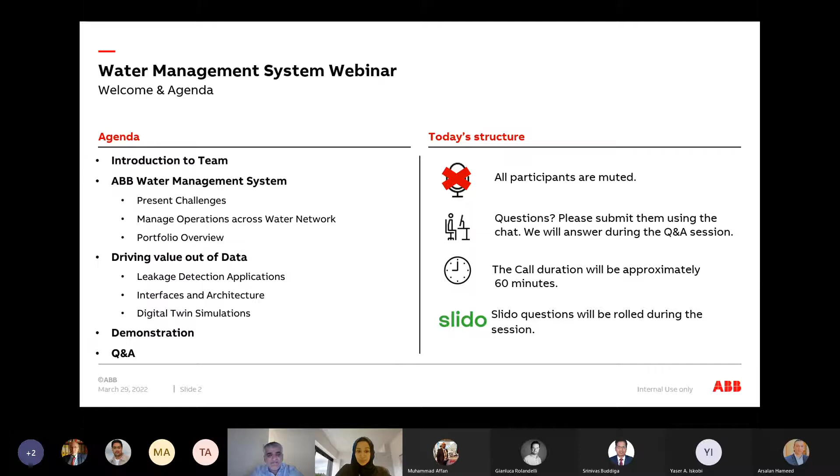So today our main speakers will be Mr. Muhammad Affan. He's our hub sales manager for power and water, taking care of the region of India, Middle East, and Africa. And he's also our UAE cluster and head of sales. Our next speaker will be Mr. Gianluca Rolandelli, our global product manager for smart water solutions, also from the same division, energy industries.

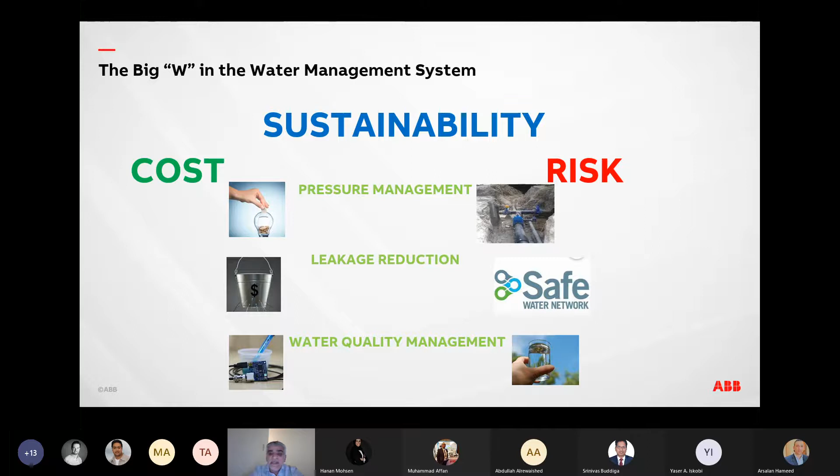As I promised, the three numbers and why these three numbers are worth remembering for us. 62 is the percentage of growth we are going to see in the water demand in the next 3 years, 2025. This is the Middle East region. These are the statistics. Very, very scary numbers. I don't think that there is any other utility service that requires such significant investment in the infrastructure growth as water today. The second number, 40, this is the percentage of water we are losing today to leakages typically.

I really hope that the numbers in Saudi are better than 40%, but the world-class utilities are operating that network to below 10%. Singapore, for example, prides itself among some of the other utilities on operating its network below even 3 to 4%. And that's really world class. And I'm pretty sure that we in the region can do much better than what we are doing today. The third and the last number to remember is 6%. And this is the GDP loss that economies in the Middle East could suffer if water scarcity is not addressed.

I mean, thank God we have got pretty robust water networks. We've got economies which are actually supported by revenues from the oil and gas exports in the Middle East region. We have, touch wood, been away from severe weather and wars. So there's not been a lot of disruption to the water distribution, water transmission and water generation in the region. Let's hope and pray that it remains that way. But there is a threat that if the water demand and gaps in the supply and demand interrupt the economy, this is the potential impact.

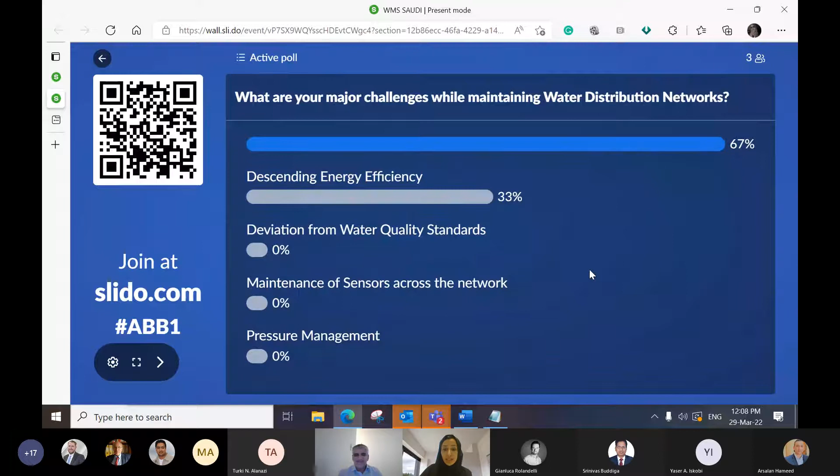So Hanan, I've just submitted my response and I'm actually answering this on behalf of a utility that we are working very closely with here, the Al Ain Distribution Company. So I hope Al Ain allows me to respond on their behalf. Yes, and I think that's great. And I think there is one missing point, which I didn't mention, which is pressure management. But tell me, Affan, why did you choose increased non-revenue water and leaks? What's the main reason behind that?

Yeah, I think I'm more focused on the 40% statistic that I mentioned. Thankfully, there's been a lot of attention from the management of the water distribution companies in UAE towards reducing this non-revenue water. However, the fact is that the network is actually growing faster and the demand is growing faster than the investments being made into the technologies that allow them to identify the leaks. And therefore, what is very clear is that there is still over 35% of water which is counted as non-revenue water. And we have been asked to support these utilities in terms of identifying technologies, but not only identifying technologies. I think technologies exist. The challenge is really implementation of these technologies through projects.

And hopefully I can just address one more point while we get the results: it's not necessary to do a very large project, a 15, 20, $30 million project, and cover the entire network and do the project in one go. We can plan and implement these projects in smaller chunks, especially when it comes to distribution networks.

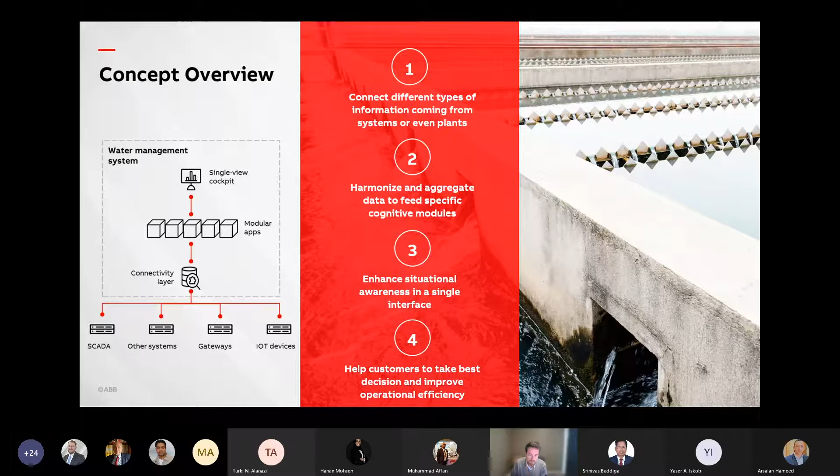Thank you. So this is just to add the concept of visibility. Thanks to the digital twin, we can see a complete digital replica of your network. So in order to do some tests, or if you want to upload a network that is similar to the current water distribution network, but with a different layout. If you want to investigate how your current assets, your infrastructure can react if you modify a topology or you add a sector, you can do this with the concept of digital twin.

And then you can also calculate the operational KPIs or decide which is the best energy efficiency consumption thanks to such kind of tools. So the concept is that some operators, some users will monitor the current status of the network, the current KPIs, but there are also some other kinds of users that can also run simulations on a future layout of the network or estimate the future evolution of the key parameters of the network. We can go to next slide.

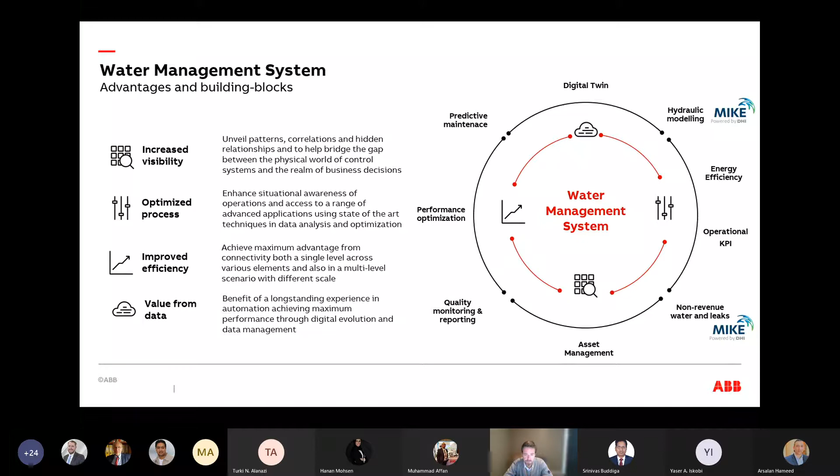And so I would switch now to my live demonstration. So I will share now my screen to show you the live demo of the solution. And then if there are any questions now or later, I will be more than happy to try to answer. So if you agree, now I share my screen and I kindly ask you, when you see my screen, to confirm that you see my screen.

Yes, Gianluca, we can see your screen. Thank you very much. Any questions so far? So far, no question for me.

Okay. So what you see here is the user interface. It's a web interface. So Gianluca, can you zoom in? Can you zoom in, please? A little bit. This way? Zoom. Yes. Okay, good.

Okay. So this is a web interface. An important concept is that the operator doesn't have to install any client. Typically what we do is install a virtual machine that will be the main server, with another virtual machine that will contain the hydraulic tools that do the hydraulic simulation of the network. So in terms of software architecture, and I also have some slides later if you have more questions on this, this is a fully owned ABB software that has completely embedded and integrated some hydraulic tools that we have taken from DHI, the Danish Hydraulic Institute.

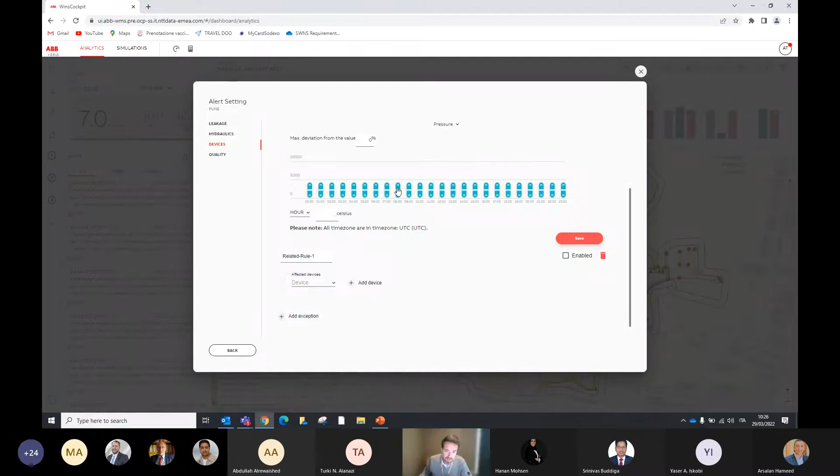So you can also select, for example, if I want an alert about pressure, and I want to define also which is the device that is generating a certain alert, and I can also define the timeline and in which time of the day this alert will reach a certain threshold, and in this case the alert will be automatically generated and displayed here on the left side. So also the concept of helping the user to configure and automate the alert that he wants to receive, because he has the task to analyze a certain portion, a certain point of view of the network, thanks to all the data that we are collecting.

Then, of course, there is also the possibility to look more granularly into a particular point of the network. So I can select a certain item, for example, a junction or a pipe of the network, and I can look at all the data, vertical data in that point. And in this case, I can see static and dynamic metadata of the network. And again, the trend that you see here can be also filtered. So I can decide here to remove elevation and only monitor base demand and unit leak per pipe length in that point, or only look at one parameter or another one and define the trend, define the time granularity, and do a vertical analysis on that part, or decide to monitor multiple parameters in that particular point.

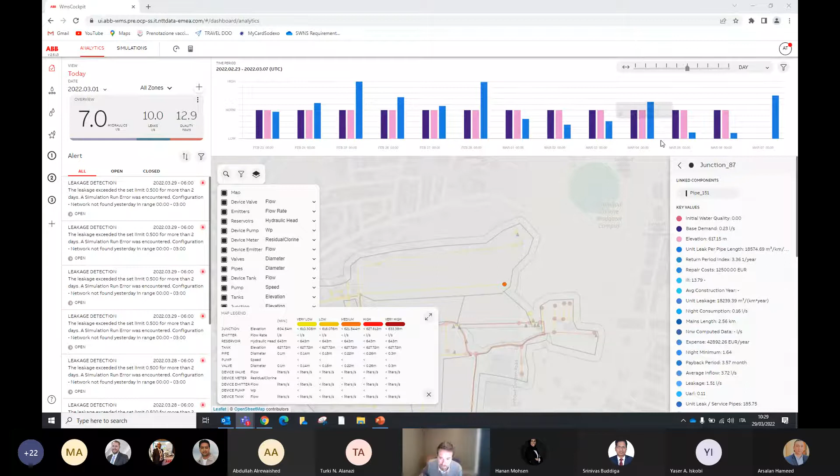What we see here is the main dashboard of the network. Then we have a dedicated dashboard for hydraulic demand, calculating maximum, average, and minimum hydraulic demand. Again, for the whole water distribution network, but you can also select a dedicated sector of the network, and then you can analyze only a certain DMA or a dedicated sector of the water distribution network.

And at any moment, you can also look at the main KPIs of the network here. So all the KPIs estimated by the system can be displayed here. And again, you can define for which sector you want to look at it, and you can also do an analysis and comparison between sectors regarding these KPIs of the network, which are also used to estimate the hydraulic balance of each district of the water distribution network.

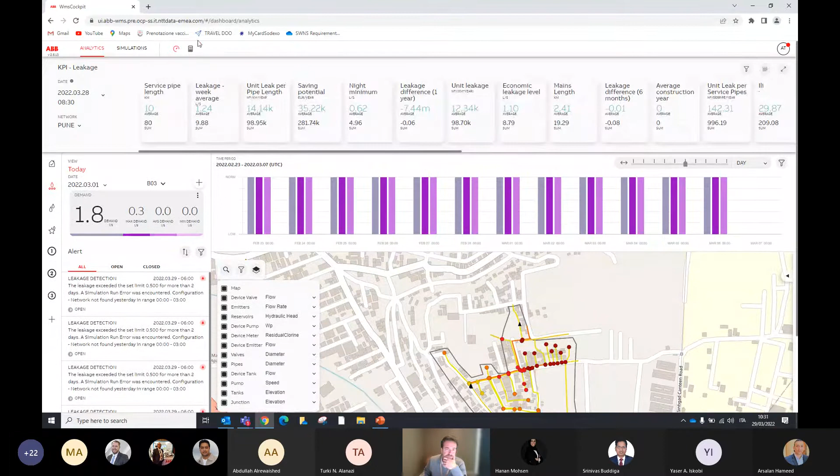Then we have a dedicated view for leakage. Here we can evaluate the leakage parameter every day. The leakage is calculated one time per day. So we can see how the leakage was every day, and we can define an automatic threshold that can alert us if a certain sector is having a bad performance in terms of leakage. And this can also be done, of course, for the whole network, so we can immediately monitor the maximum, average, and minimum leakage of the whole water distribution network.

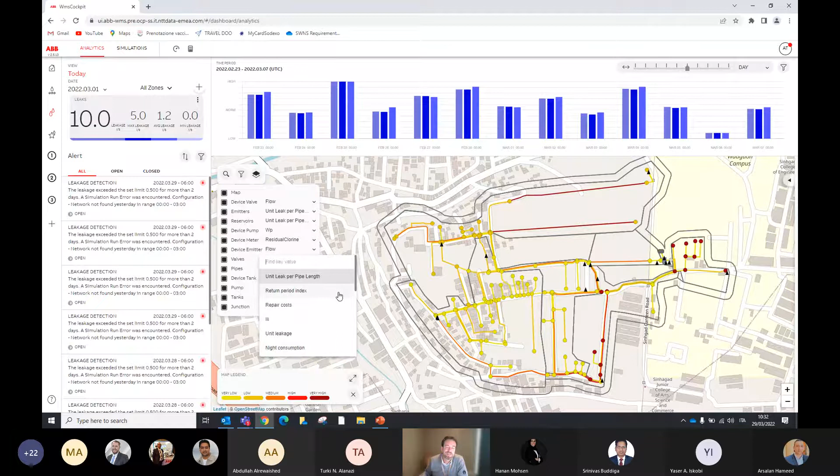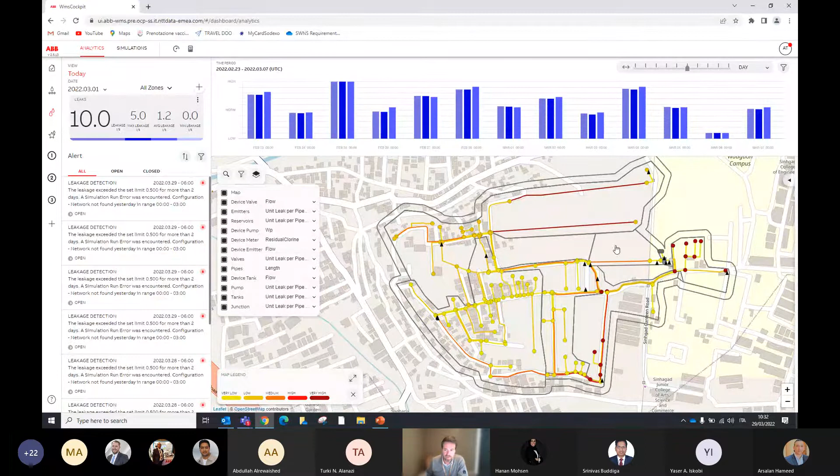And when we switch from one dashboard to another, the system is also automatically adjusting the parameter here. You can manually adapt the parameter, but since I am in the leakage view, the drop-down list is now based on the leakage parameter for each different asset of the water distribution network. So this is done automatically for the user.

There is also a dedicated view on water quality. This is another point of view of the water distribution network, where the estimated water age is calculated in terms of hours the water is resident in the pipe, for example. For each pipe or valve, we have the water age, but we can also select parameters such as substance concentration or residual chlorine. These are water quality parameters that are estimated and digitally represented by the hydraulic modeling tool.

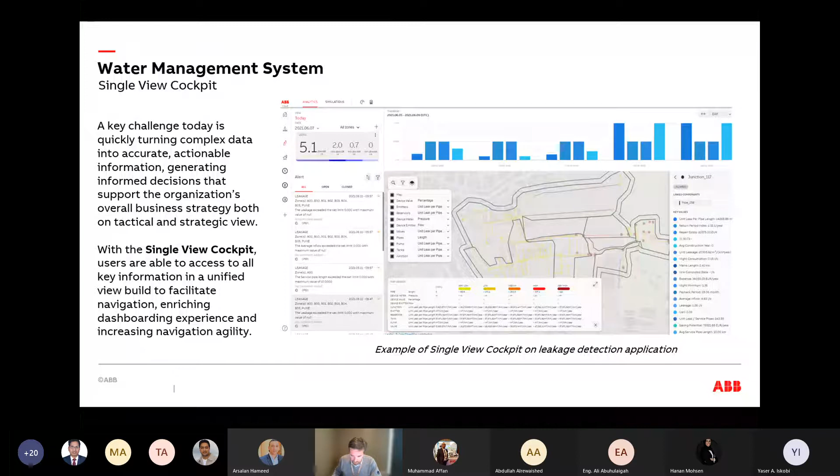In order to answer this question, I would like to use a slide. I should have the slides of today, but let me search for one slide. Yesterday I received the slides, so I will share the slides of today, but I prefer to share it myself. Give me one minute. Okay, this one. I found it. I'm sharing my screen again. Please confirm when you see my screen. Do you see my screen again? Yes, we can see your screen.

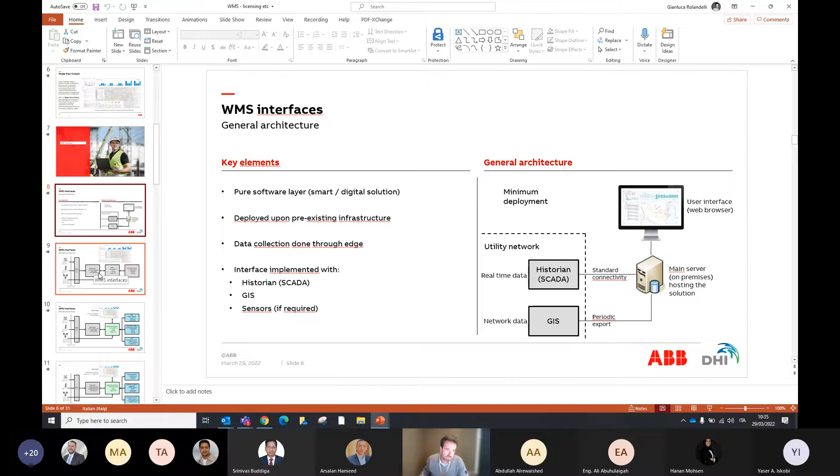Okay, thank you. Here you see the general architecture of the system. Typically, this is a smart digital layer that we install on top of a pre-existing control system, if there is a SCADA or a DCS. This system is for monitoring, implementing the digital twin, and calculating simulations, but we take the data from a control system. Of course, if the control system is not present or must be updated, ABB also has an offering for SCADA or control systems. But in general, this system takes data through an edge from SCADA or smart sensors, and we do not give the data back to the DCS or SCADA.

Why? We have typically implemented the concept of a data diode, because in the initial phase of deploying such a solution, we do not want to interfere or break something in the control system, if present. We want to read data, monitor data, and calculate the KPIs of the network from a hydraulic point of view, merging the data we collect from the control system with the data automatically evaluated by a hydraulic model running in the backend of this water distribution system.

So the WMS is the interface you see here, and it sits in the middle between the data we collect from the field and the data automatically running in the backend, in the digital twin and the hydraulic modeling. The control system typically already exists, and we interface with it using standard protocols like OPC UA or DA, for example.

We want to give feedback to the operator regarding which could be the optimal set point to configure in the SCADA in terms of valve position, for example, according to an objective that I want to achieve. For example, let me use the concept of energy efficiency. I have also seen from the questionnaire that we did after the first part that energy efficiency and energy optimization is a key concept that a utility like you is investigating.

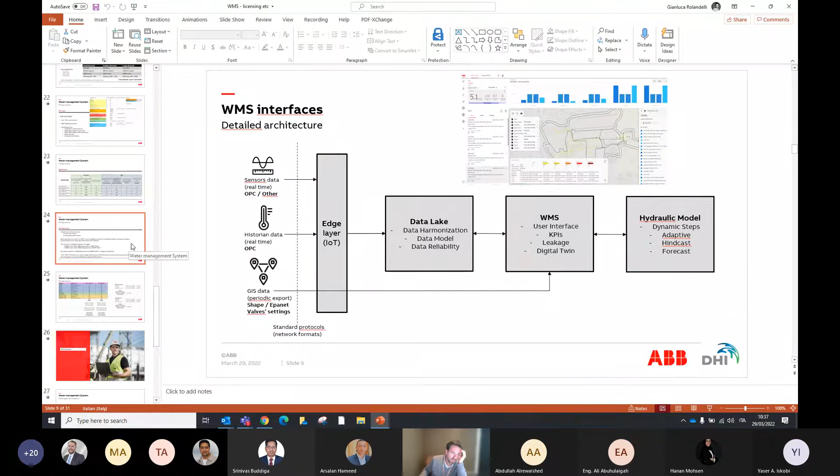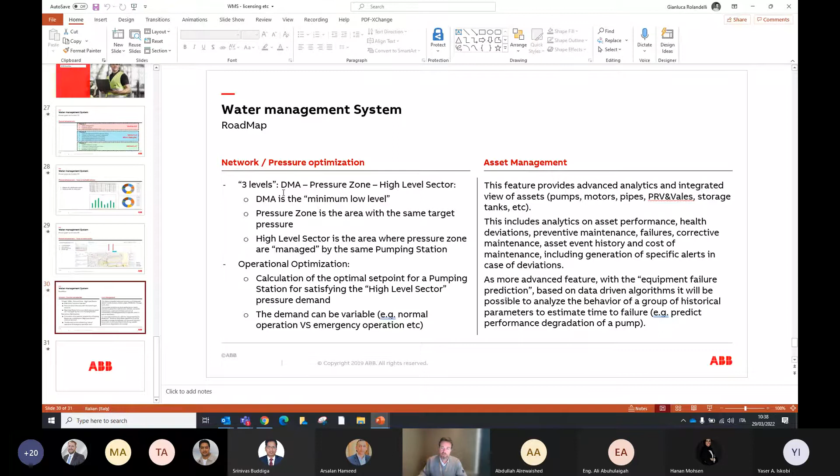So in order to do that, we have to define the pressure optimization. And for example, in terms of defining the optimal energy consumption of a pumping station, we have to define what is a pressure zone. So you can imagine here, if we switch back to the demo, that if you have a water distribution network, instead of a leakage zone, you can imagine this as a pressure zone. So instead of evaluating the leakage, we want to evaluate which is the optimal pressure for each sector of the network.

But in order to do this, you need, first of all, to be sure that the sensors are properly positioned. So there is an initial evaluation phase that we do together with the customer in order to understand which are the optimal parameters that we want to measure to estimate the best pressure for each sector. And we collect this data from the SCADA that typically is pre-existing. If there is the requirement to send some command automatically back to the SCADA, we evaluate this project by project and case by case.

Long answer, I hope it was clear. If not, please tell me and I will try to explain better. Thank you. It's clear, thank you. Welcome. Any other question? I kindly ask my ABB colleagues to help me: if there are hands raised, please alert me so I will answer. If I do not see a question, apologies, but help me to understand if there are questions. Thank you. If you think of other questions, in the meantime, I continue my demo.

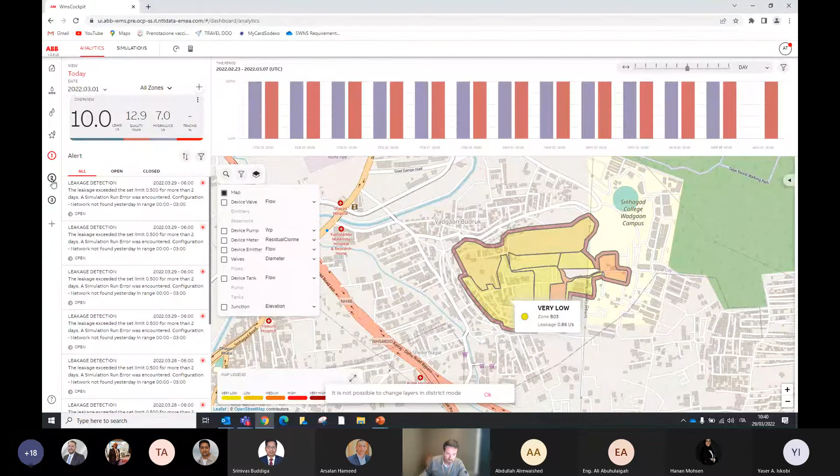Before switching to the concept of digital twin, let's continue with this example. Here, the user can define its own custom interface. Also, here you see that it's easy to build your own digital dashboard. So you can decide that instead of hydraulic leaks and quality, you want to monitor demand or average leakage or minimum leakage or some water quality parameters. So here you build what you want to see in the main dashboard.

So again, this is a key concept. The user decides from which point of view they want to monitor the network, and they can also decide to enable or disable some layers of the network. If you want to concentrate your attention only on the junction distribution of the network, and you are not interested in pipes, you can remove the layer. And this is another key concept here. We need to start from a digital representation of the water distribution network, and this digital representation is typically present in a GIS system.

So our three main sources of information are, first, a SCADA or a control system. If it is present, we interface with it through a standard OPC interface, and from it we receive real-time data from the physical sensors in the field. The second source of information is asynchronous, one-shot: the initial digital representation of the network. We are able to import it using the most standard formats for such tools, that are EPANET format, SHP format, GeoJSON format, and BIM format. These are the de facto standards used to digitally represent a water distribution network map in terms of georeference of the assets, position of the pipes, and all the metadata of these assets: pumping stations, valves, pipe junctions, and so on.

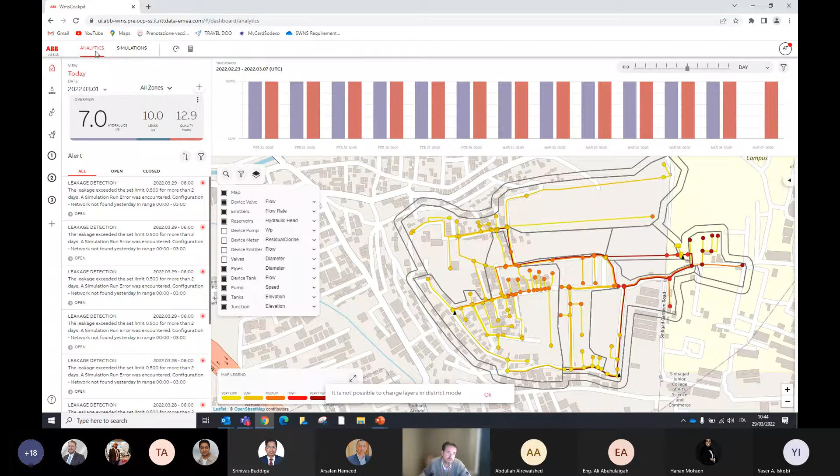And in order to see that, we have to switch, you see here, from the analytics tab to the simulation tab. If I switch to the simulation tab, initially I do not see anything, because here this is the digital twin and I need to decide which is the aspect that I want to monitor in terms of digital representation of the network. So a new button appears here, and it's the button related to which kind of simulation I want to run. Let's start from the hydraulic simulation.

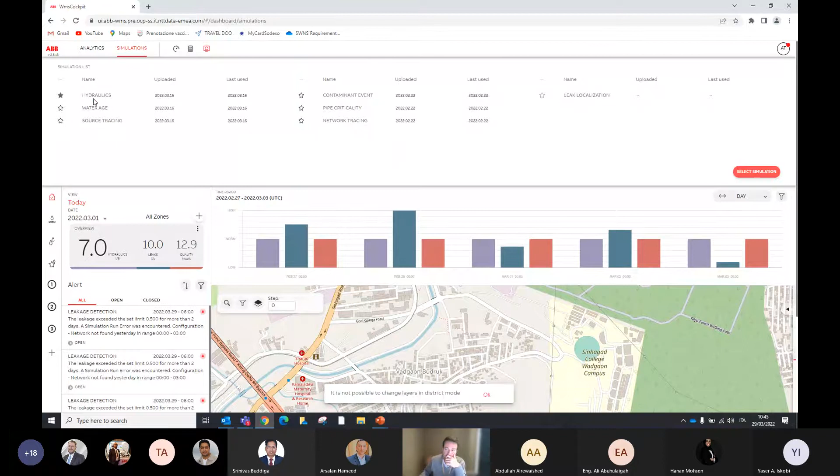So here you see an initial example of what is a digital twin of the network. This is no more the water distribution network that we have monitored in the analytics tab, but is the real digital twin. Now, again, remember that this can be done today, in the past. So we can do also historical analysis, and we can decide also how to represent here, in terms of trends and data granularity, the status of my water distribution network.

Here, now we see that the layers are completely different. This is a digital twin representation that wants to display the pressure parameter in any node of the network and the flow parameter in any link of the network. You see that now the junctions are generically nodes and the pipes are generically links. We do not see here pumps, but we see here only a certain point of view of a digital representation of the network.

And now I can click in any point of the network and I can see the hydraulic parameter in that point, and I can decide also to represent this parameter. And the pressure here in this point can be monitored now. So step 0 is the current situation. This is like to have a virtual sensor in any point of the network. And this is why this tool can help you to understand which are the most critical parts of your network in terms of pressure value, for example, without the need to put a physical sensor there.

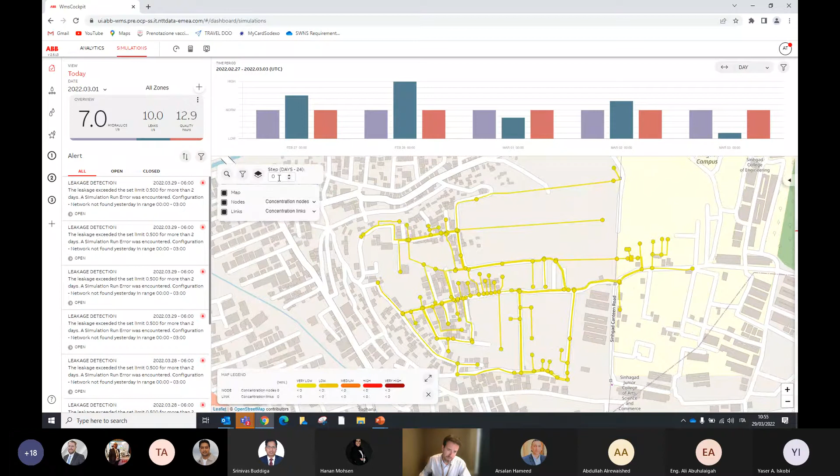I give you a last example. Let's use another kind of simulation, the contaminant event. In this case, instead of the hydraulic parameter, I want to simulate the evolution of a contaminant event, for example in the initial reservoir of the network, in terms of concentration in nodes and links, for maximum impact after 6 hours. I want to see after 6 hours which parts of the network are most critical. And the tool is able to do this.

You see here that in certain parts of the network, after 6 hours, if I do not make an intervention, these parts are immediately impacted by a contaminant event. Again, you can do this kind of digital twin simulation if you have a good, reliable database in which you trust your data. And thanks to the data that you trust, you are sure that the hydraulic model is properly calibrated. Also because you can define a threshold for an automated alarm if the parameters evaluated by the hydraulic model match or not.

If there is a big discrepancy between the data estimated by the hydraulic model and the data measured by the sensor, this can be helpful because this could be an indicator that the sensor needs maintenance because it is sending wrong data, or because the communication between the sensor and the central SCADA is having some communication error. So these are all examples of the potential of data that you could use.

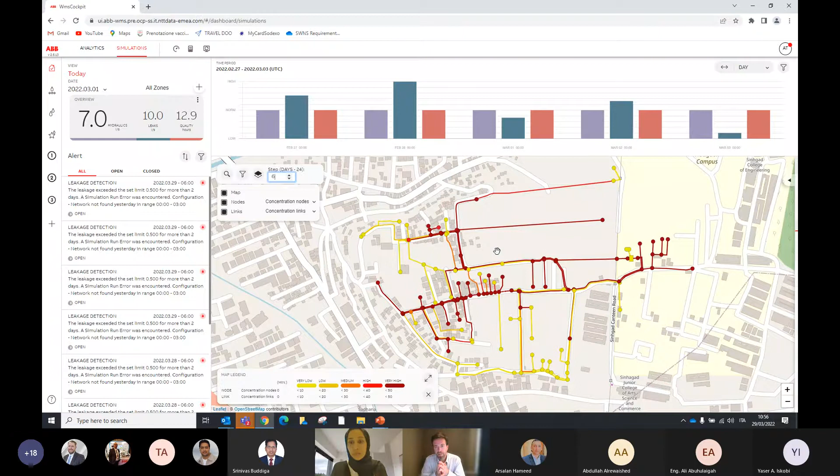Adding such kind of digital layer, adding the proper hydraulic modeling, but combining that with data analysis capability is the key factor to achieve the result that you want to obtain with this digital tool. It's important to have, in my opinion, a partner like ABB that can guide you in all the aspects of this evaluation, from sensor to SCADA and to the smart digital layer like this one.